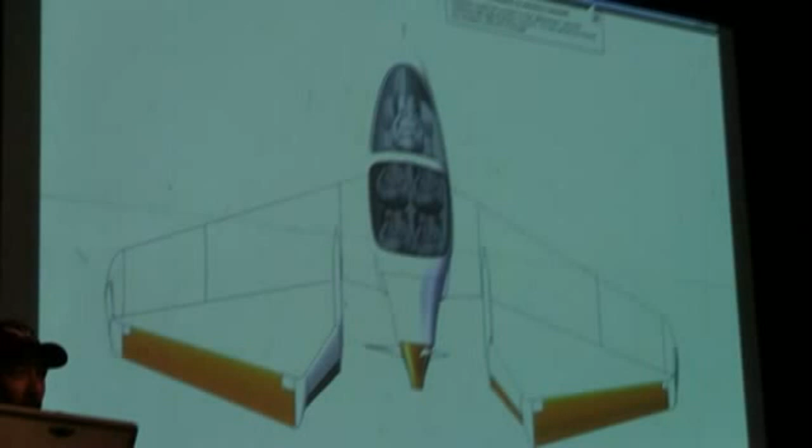I want to talk a little bit about Synergy. I know that some of you know very little about it, others of you know a great deal about it. Most of what you can learn about Synergy is available online through either the Synergy Aircraft website and the links. But more of the stuff that we like to talk about is on Oshkosh 365. That's now archived, we'll be moving new content to the AIAA forums. So I'll encourage all of you to look online, just Google Synergy Aircraft if you want to find out more stuff.

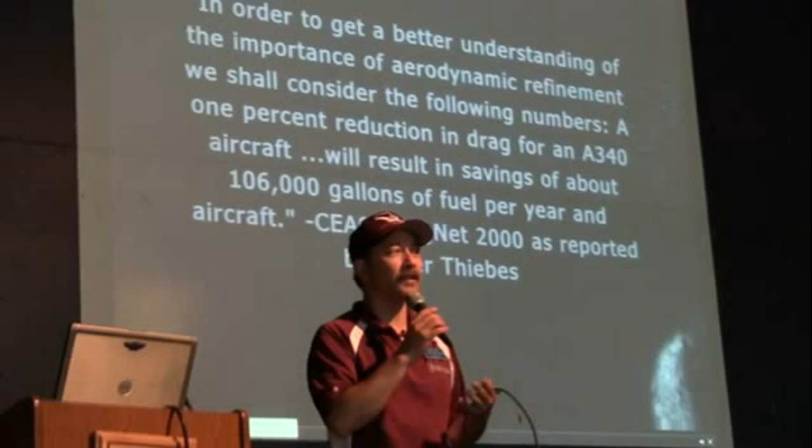But before we talk about the details, and I will have a lot of time for questions and answers, I really want to talk about the bigger question. And that is why bother to do this? It's crazy. I told you I couldn't afford my airplane, I couldn't afford to buy an airplane. I didn't feel like I could even afford to put a few thousand hours into building something, a composite kit like I wanted to. So what did I do instead?

Come up with something new. I'm 50,000 hours into that, so it's not like I'm actually saving anything. But the reason why we have to do this sort of thing should be obvious to everyone.

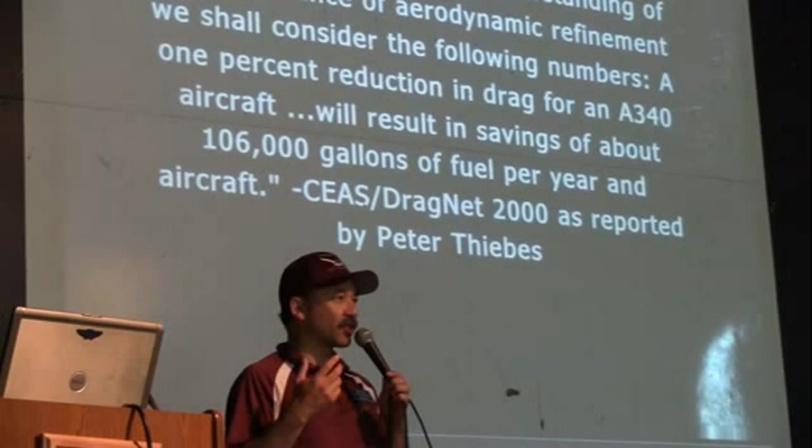We have an extreme need to replace 330,000 aging general aviation airplanes. Everyone here knows we don't drive 1967 cars for the most part. We do revere them, we do take care of them, we do preserve them. But they don't offer the value proposition that the general public wants and needs. Our airplanes, we love them, but they don't offer the value proposition that the general aviation public actually needs.

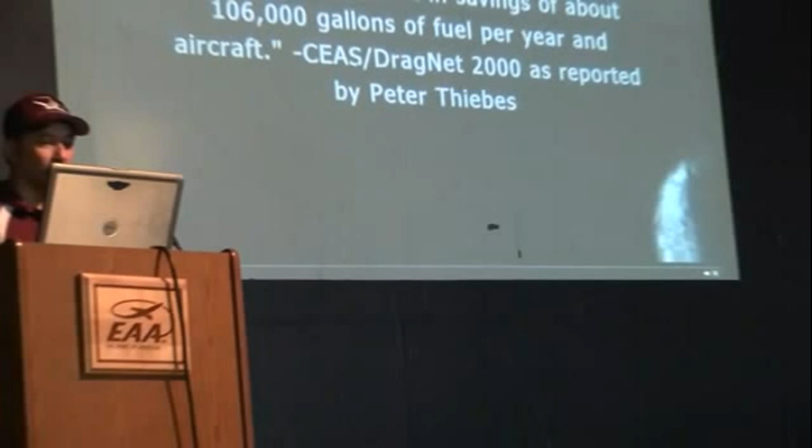We need to fix the broken hub and spoke transportation system, and in order to do that we need to understand what the problem really is. I don't think that, since this is really old information and we're resurrecting it out of the archives of the 1910s, 1920s, 1930s, that we're as intimately familiar with it as we should be. We don't fly airplanes using effective fluid dynamic techniques.

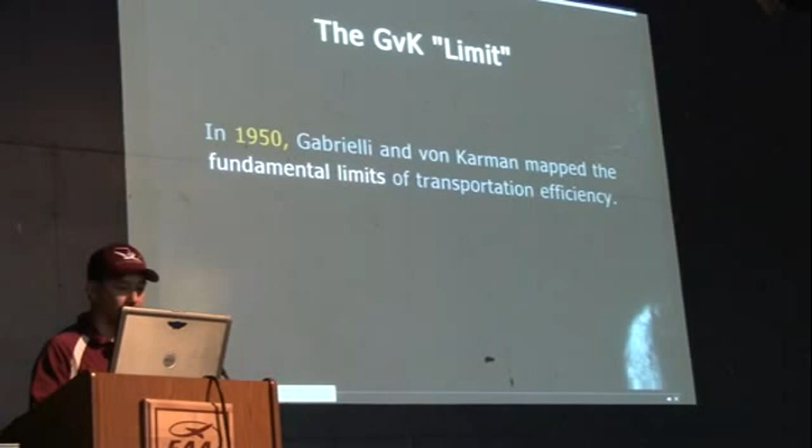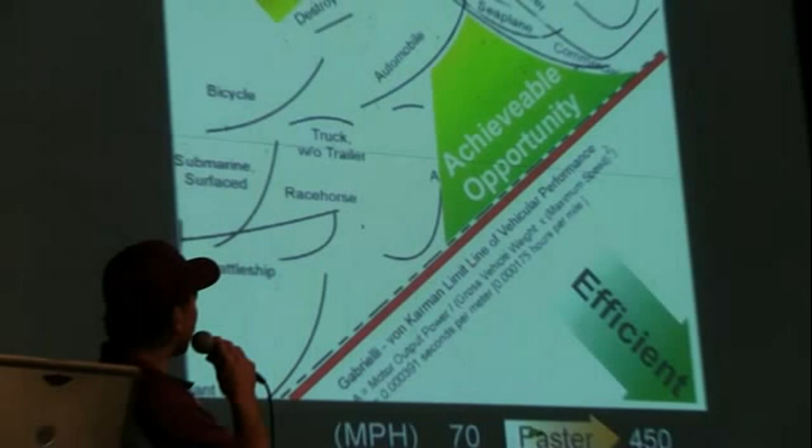This is a study of the problem. Gabrielli and von Karman studied it in 1950, literally. And what they discovered was that most vehicles travel from slow to fast, from light to heavy, on a scale where this is energy use and that's speed.

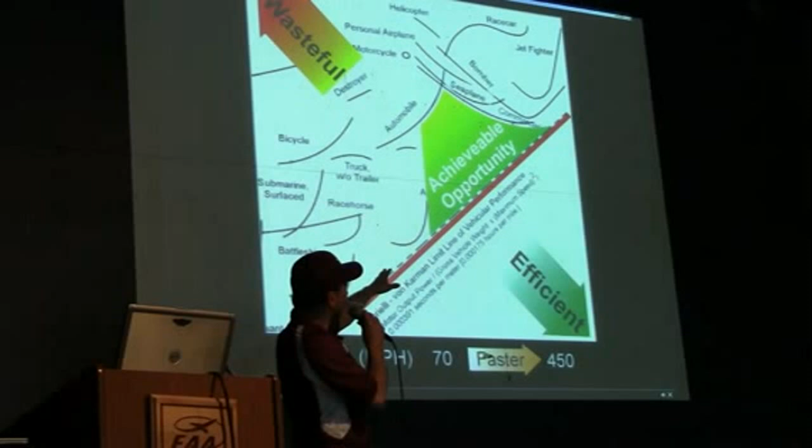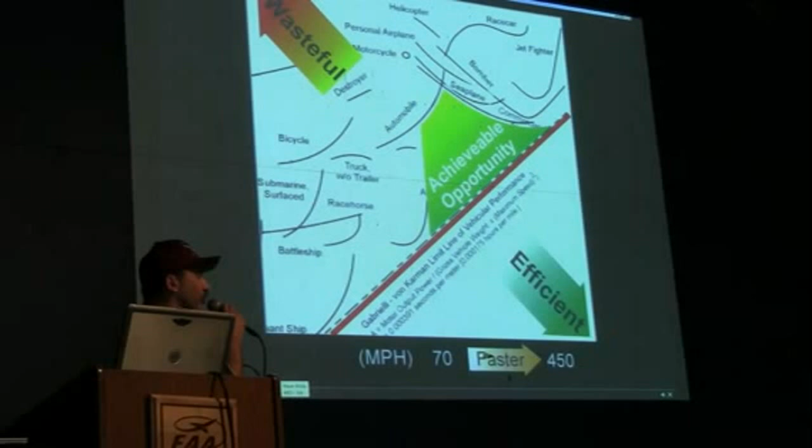And when they found out that fighters and airplanes and bombers did okay, and battleships and merchant ships did okay, railroad cars did okay, and so on, but between 70 and 450 miles per hour, we do not know how to fly. We pay a tremendous penalty for trying to fly with a heavier than air aircraft.

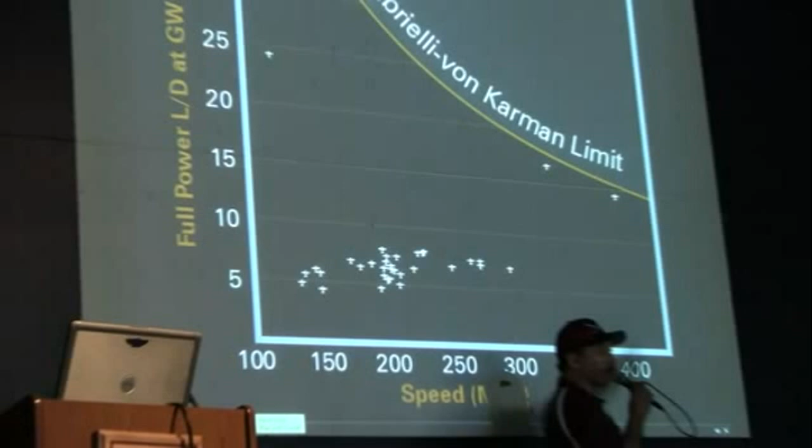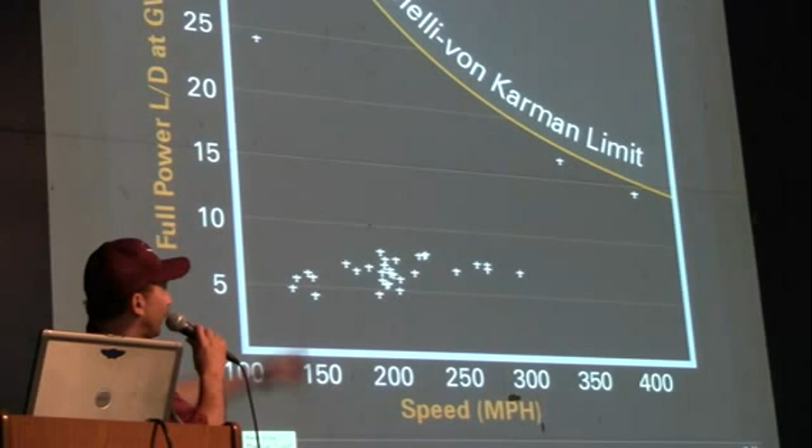When the same information is put into a form we're more familiar with, this is full power L over D at gross weight versus speed in miles per hour. And here is AirVenture, where you can wander around and see all those airplanes. But what's possible is actually not the yellow line, it's beyond the yellow line.

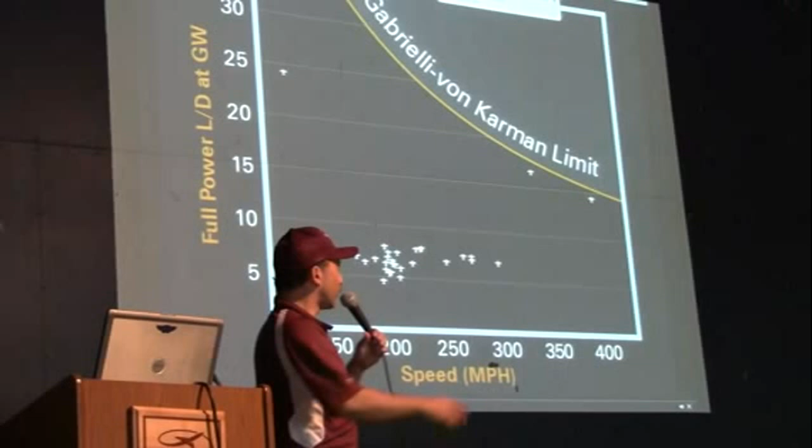The yellow line is where we can get with present-day technology. Folks, this is an indictment of a century of aeronautical teaching based on a premise that's a little bit flawed, not very flawed, but it's a system unto itself. If you step outside that system, you move from a closed thermodynamic perspective that uses dynamic pressure, 1/2 rho v squared, into the paradigm of open thermodynamics.

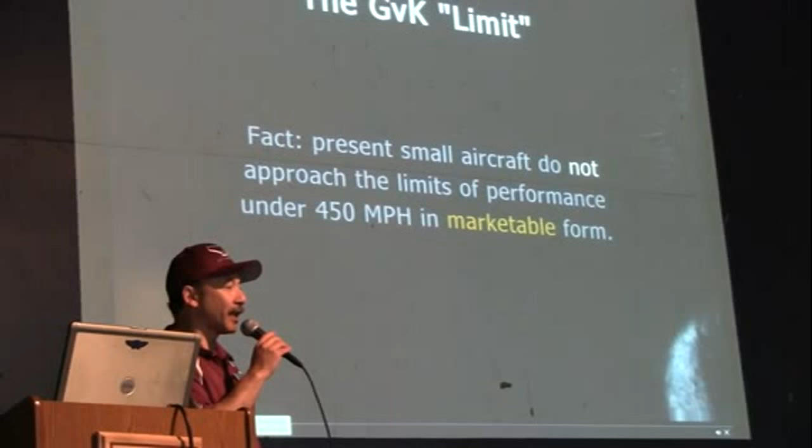Taking the fact that we have an engine and a fuel source, let's use that to modify this problem of viscosity of the air we fly through. So synergy is really all about flying using the principles of open thermodynamics. There's been a little bit of misunderstanding about what I mean by open thermodynamics. I'm not talking about heat, cooling, or drag. I'm partially talking about using engine power to control the boundary layer, but there's a little more detail we'll talk about later.

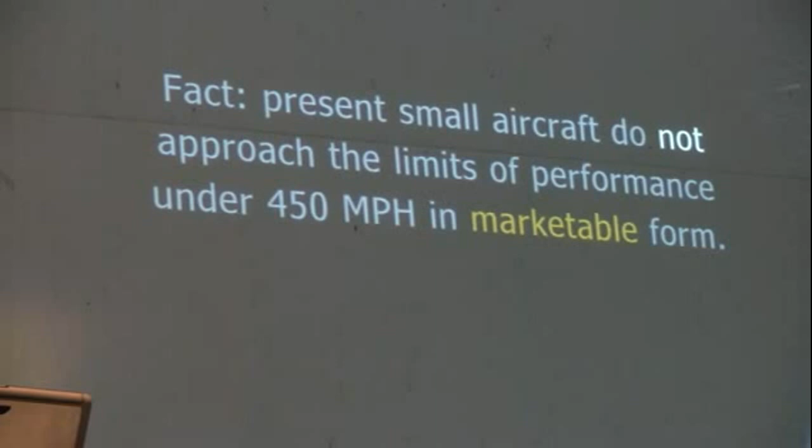Up until now, when we try to approach the Gabrielli-von Karman limit, we wind up with special purpose aircraft. As most of you know, I'm entered in the NASA Green Flight Challenge. We sure hope we can pull it off to be there up to this point. If they hadn't had to delay the contest, we would not have qualified to be in it at this point in time.

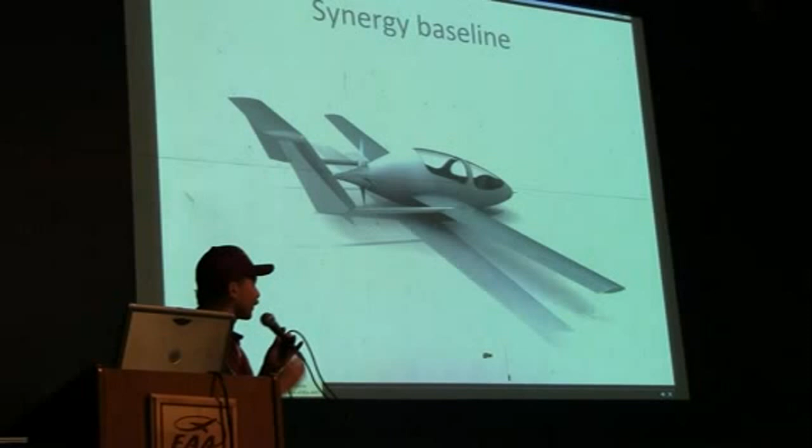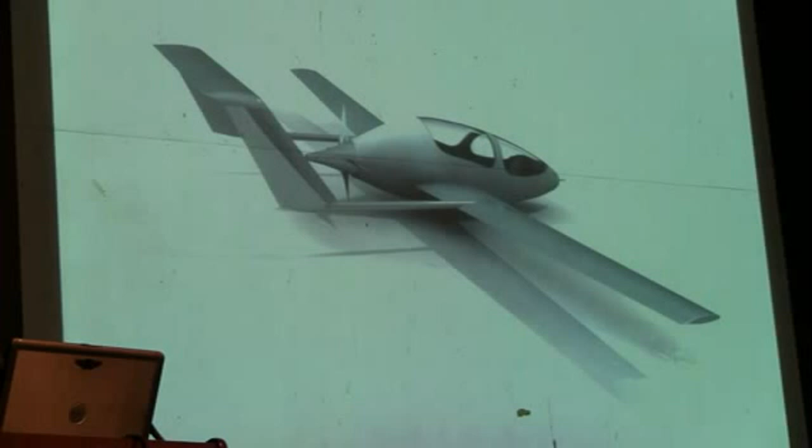And so this is where we start. When I started talking about these principles on beyond streamlining, I imagine most people would come up with something like our baseline aircraft. It's pretty cool looking, I think people like that plane. It's a big, roomy, four or five place motor glider, but it has a lot of limitations.

Very efficient, but not very practical. So we can't really call things like this state-of-the-art, even though we continue to produce long wingspan, high aspect ratio, relatively speed-limited airplanes that are difficult to manufacture and inherently expensive.

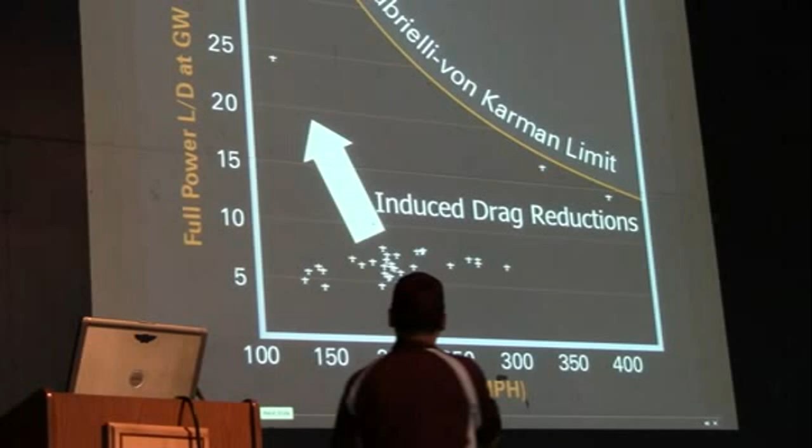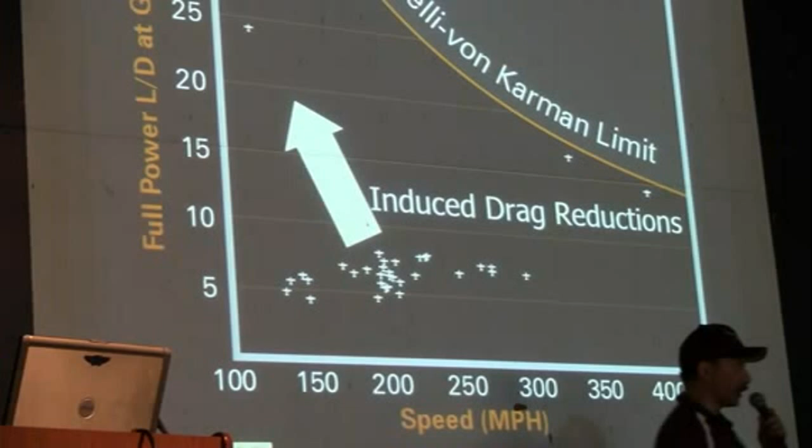So the problem of where we are on the graph versus getting more L over D takes us backwards. If you take a typical general aviation airplane and focus on the induced drag problem by giving a longer wingspan, we wind up slowing down in the quest for more L over D. You don't necessarily need more L over D. What we'd like is greater fundamental efficiency.

So as we go faster, we get a lot less need for L over D. I think that's the point we talked about earlier.

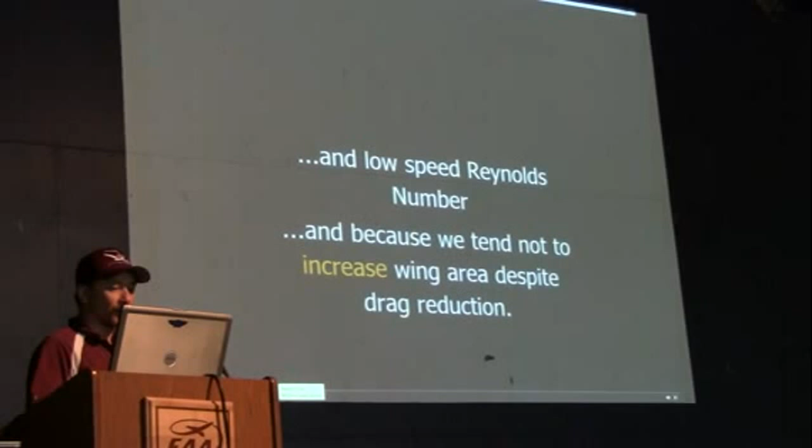This is a significant statement. A lot of our wings are very narrow chord, very short chord Reynolds number, meaning they're flying slow with respect to the air itself. If you increase wing area or chord, you can hit a sweet spot in the Reynolds number versus drag equation, giving a little more opportunity.

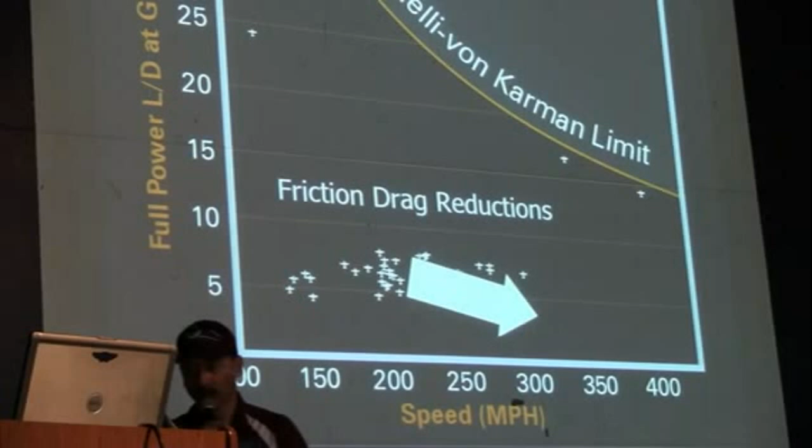And that's illustrated in this graph. As we go faster with a typical general aviation airplane, we lose our L over D. So why are we doing this? Why are we going for more L over D or more speed instead of going directly at the problem?

You have to take aim at both things at the same time. Less induced drag is critically important, but so is managing small-scale viscosity, the boundary layer turbulence that sucks your airplane and sticks you in place.

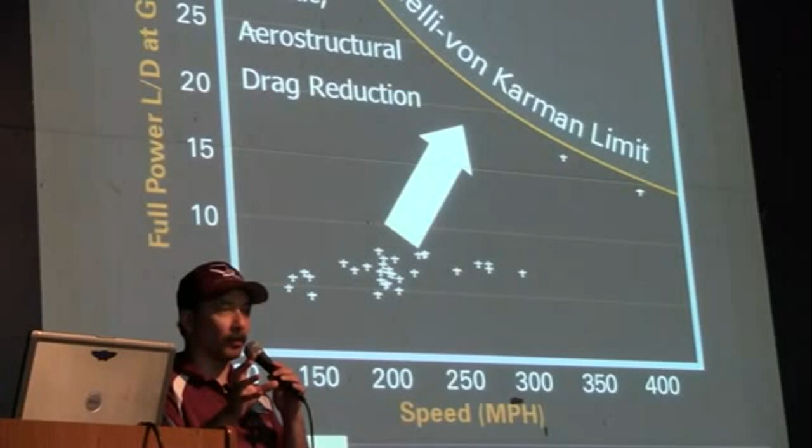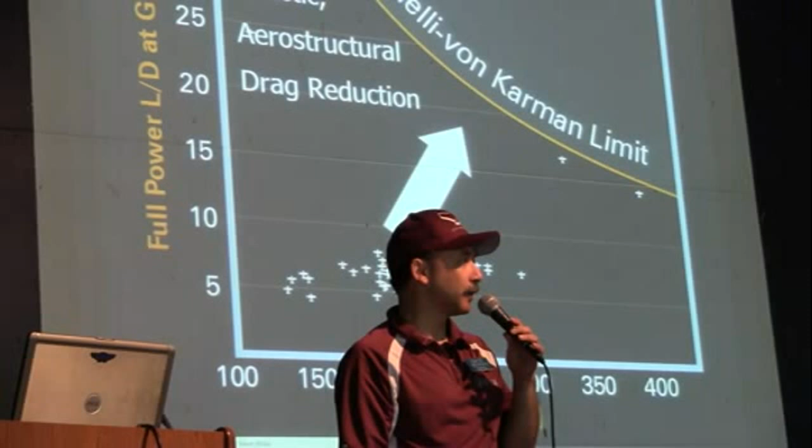I'm going to plant this thought in your mind briefly, because we'll get to a neat illustration of it shortly. You can't see the air, so you don't really realize how sticky it is, that it's sticking to your plane. You're dragging it along. If you flew through a cube colored a particular color, and you could see that air, you would just be dragging it along the sky, painting a big old stripe across it.

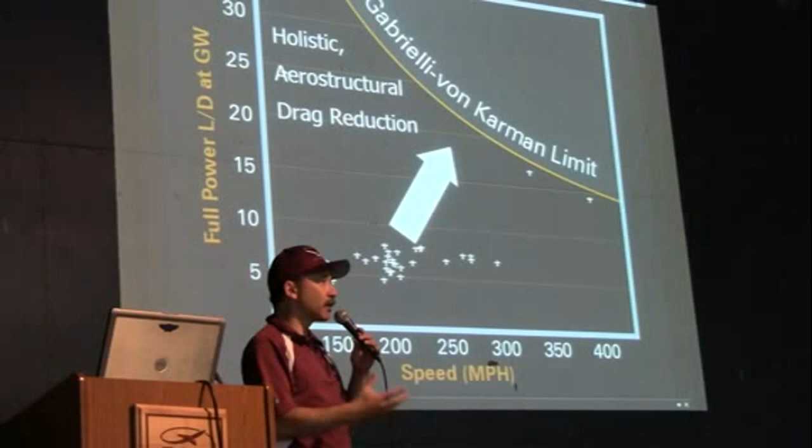And of course, we do see this from time to time in our wake vortices. The wake vortices get dragged on for miles and miles. That's what drag actually is. Fluids don't have any drag.

D'Alembert proved in 1752 that a perfect fluid has no drag whatsoever. You can fly through it at any speed with no drag. But if I introduce viscosity into this equation, if I make it sticky, then you have drag on the small scale, the skin friction of the airplane, and drag on the large scale, the wake vortices of the airplane.

So in other words, to get to the Gabrielli-von Karman limit, we have to go intensely after wake vortices and skin friction, both at the same time, because it's like the air is ketchup. The air is like ketchup, it sticks to everything. You throw ketchup on the table, and I take a spatula and try to get it off. What am I going to do?

Are you following this? Ketchup on the table - clean it up. Are you going to have anything but a mess? No, your experience tells you it's going to be a mess.

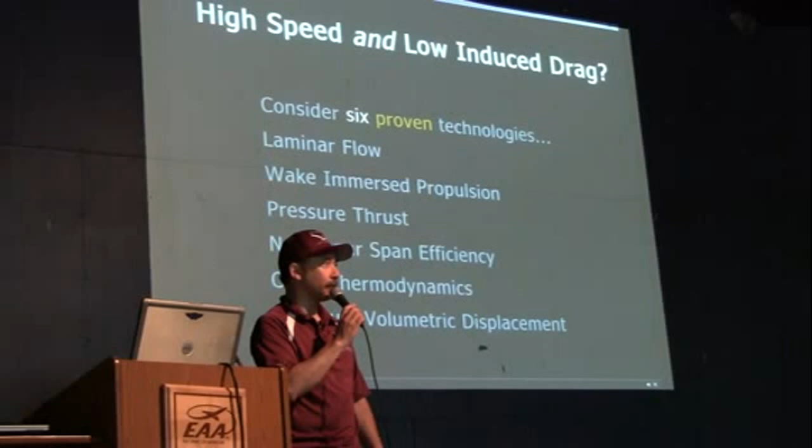That's what your experience tells you, but your experience is wrong when it comes to what we fly in airplanes. The idea that we have to drag the atmosphere with us is an incorrect assumption, and we need to go after changing that. Here's how we're going to do it. I'm not saying synergy is the only way - in fact, I hope it's the first of hundreds of ways. My goal is to propagate this technology into as many forms of airplanes as we possibly can, as quickly as we can.

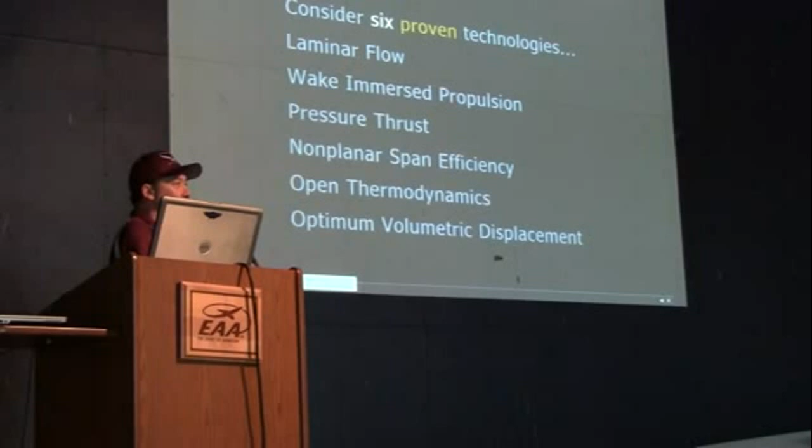We need to use laminar flow. We have a lot of planes that use good drag reduction, natural laminar flow, but they do that on the wings, and that's good. But most of the drag comes from the fuselage, so let's go after natural laminar flow on the fuselage.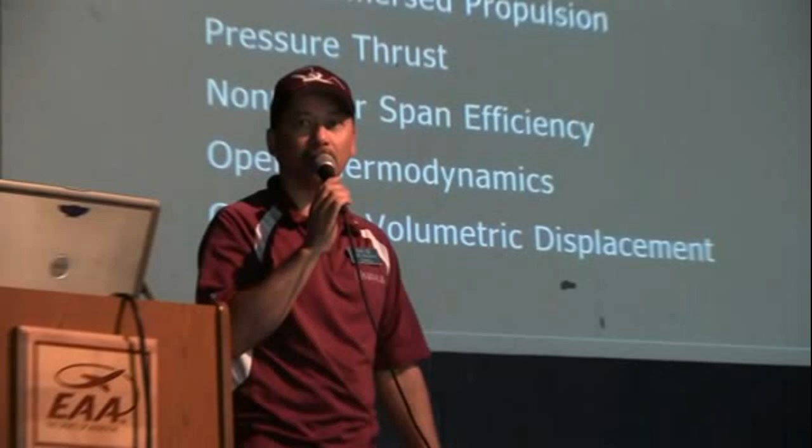Wake immersed propulsion is a great way to do that. When I say wake immersed propulsion, I'm not meaning a pusher-prop airplane. A pusher-prop airplane is not necessarily very efficient - we haven't delivered on the promise of having the prop in the back. As I usually do at Oshkosh, I present on prop design and get into a long-winded spiel about this, but...

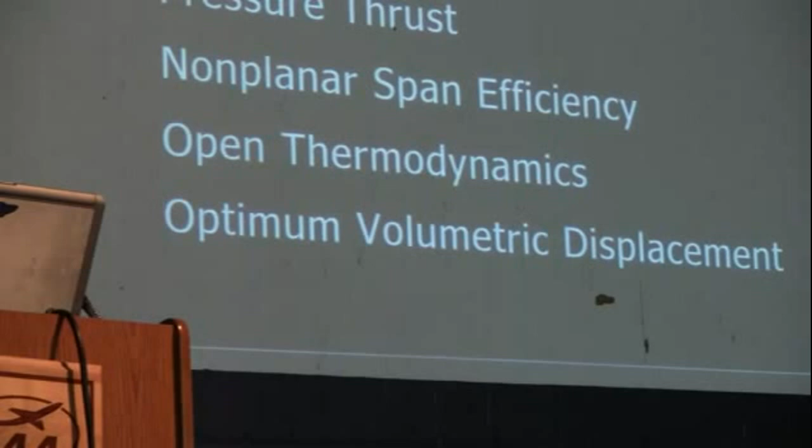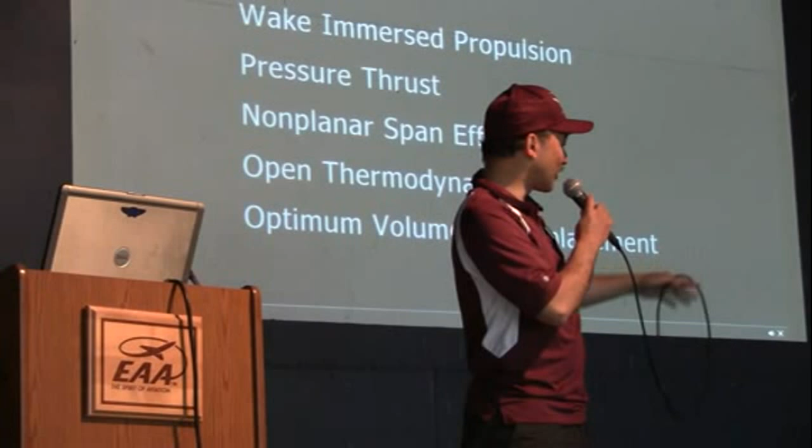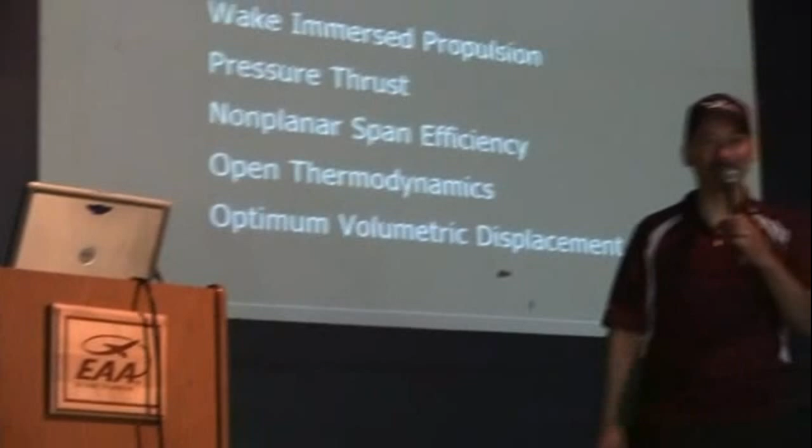I gotta tell you, my family is the whole reason that I get to do this stuff. They have heart and soul, sweat and blood, put everything we have collected into doing this work. My father and my son and my daughter piled into a truck and drove 36 hours to get here. When they were driving down the interstate, our suspension rig for the quarter scale model - one of the hooks came loose and smashed the nose into the trailer. Their hearts are on the floor, they're thinking it's all dead. They're trying to go to the hardware store to get stuff to patch it back together. They're sleeping in the tent by the airplane tonight. Oh my goodness, it's just that kind of story, day in and day out, year after year. This presentation, by the way, is one I've used before. My daughter Kelsey is an aspiring graphic designer as well - she had a nice presentation already for me. I didn't have time to use it, so I owe my family more than I could ever express.

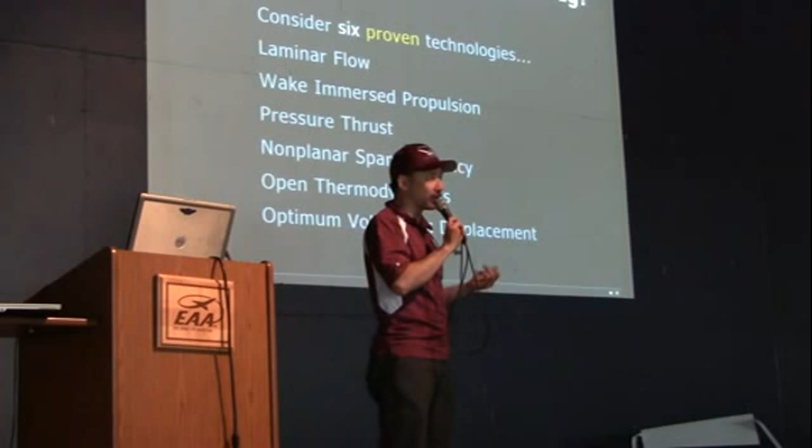Pressure thrust - oh, I'm sorry, I got to get back to wake immersed propulsion. The kind of thing you need on the back of an airplane is a fan. It needs to have a lot of blades, it needs to have a small diameter, it needs to have a lot of pitch. That's a nutshell synopsis of what needs to be pushing our planes through the air.

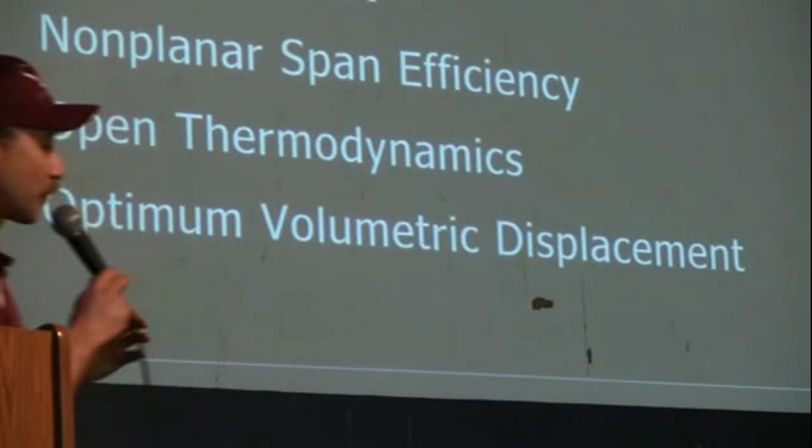It's extremely efficient. But instead of having something like that behind a body that doesn't seem to care about the inflow field, we need to make sure the body is a natural laminar flow body, and that we put the fan significantly behind the point of transition, and that we use good inflow design so we don't make that impeller fly in a terrible environment for making thrust. Wake immersed propulsion delivers the goods - it's at least a 20% improvement in efficiency over a standard tractor configuration if it's done correctly.

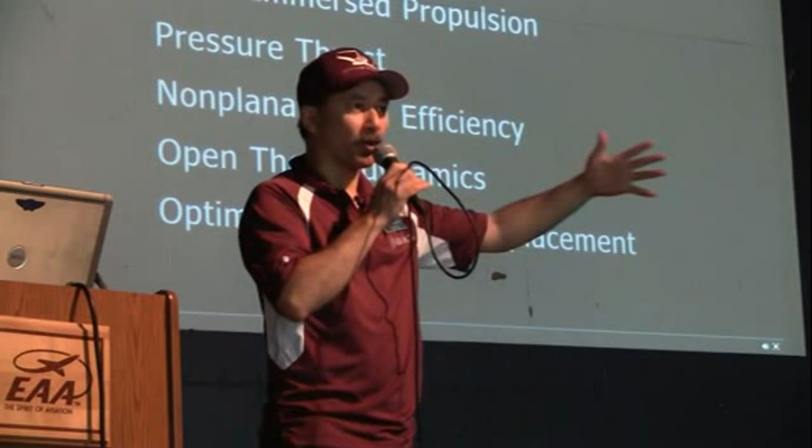The next point kind of conflicts with wake immersed propulsion, and that is pressure thrust. As Goldschmied evaluated, it's a way that you cause the air that you've parted with your body to collapse back on the aft body powerfully, so as to restore the energy that was lost in expanding that volume of air and moving through it. Now, I don't know why after 50 years we still don't really understand or utilize this concept. It's not rocket science, it's pretty simple physics, but we don't have any proof, we don't have any flying concepts out there making this a commercially viable thing so we can pour money and dollars into refining and optimizing it.

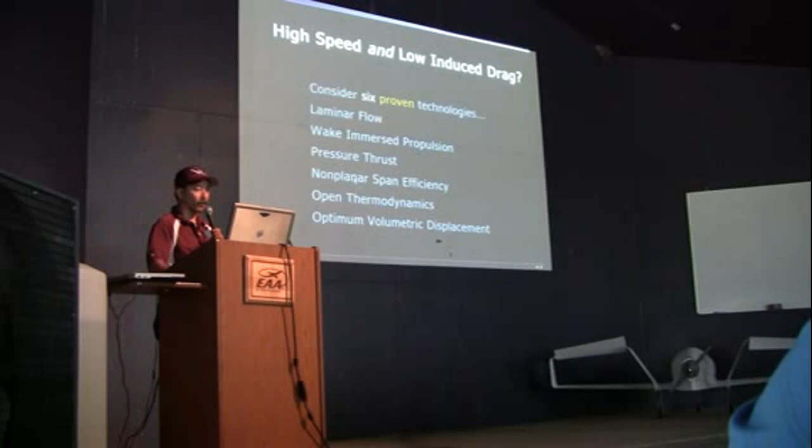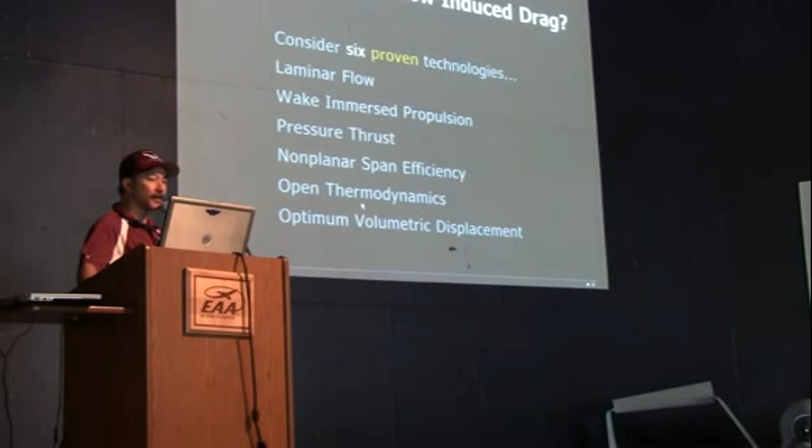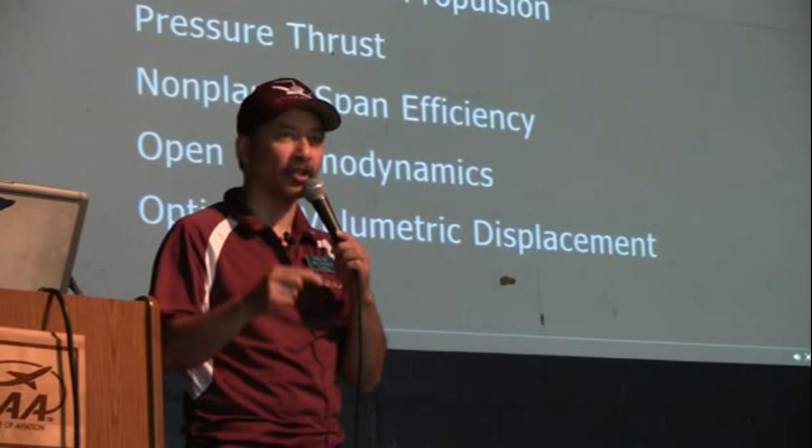Open thermodynamics is really the same thing as powered boundary layer control. It means using engine power, fuel, and heat in ways that change the dynamics of our calculation system. When I talk about Synergy to folks who are heavily reliant upon textbook mathematics, CFD, spreadsheets, and other programs to deliver preliminary evaluation of an aircraft design, I have to tell them: look, you've got to get under the hood. Look at what your calculations are actually showing and telling you. Some of what they're telling you is only true 95% of the time. And when it's not true, it changes everything.

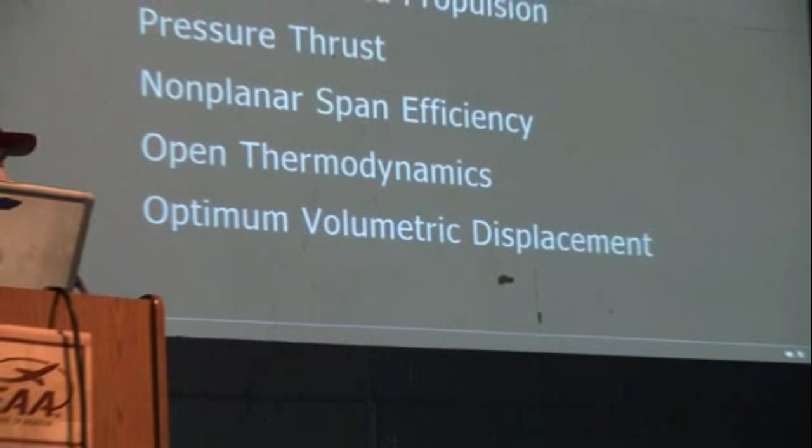So we're still in search of a better fluid dynamic calculation paradigm, a program that will do it right all the time and do it in real time. I've got a couple ideas about that, and hopefully we'll get to them.

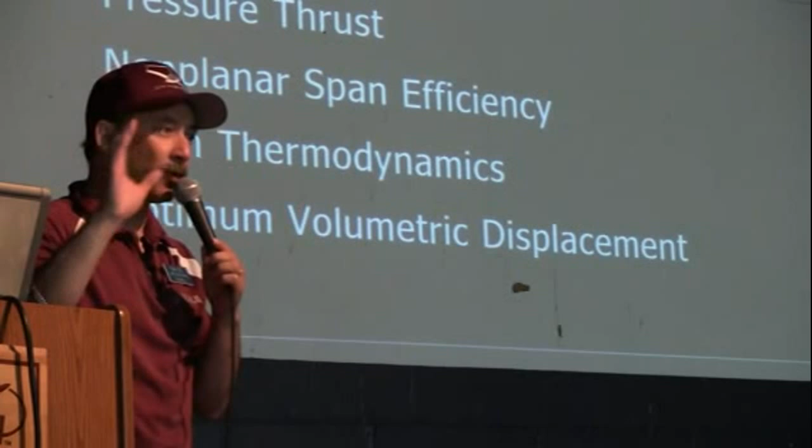The last point is optimum volumetric displacement. That's subsonic area ruling. That means we're not going supersonic here, but we're going to treat the design of the airplane as if we were. We're going to gently disturb the air, not disturb it with pulses, not disturb it with a huge variance in the cross-sectional area that we present to the plane, to the atmosphere.

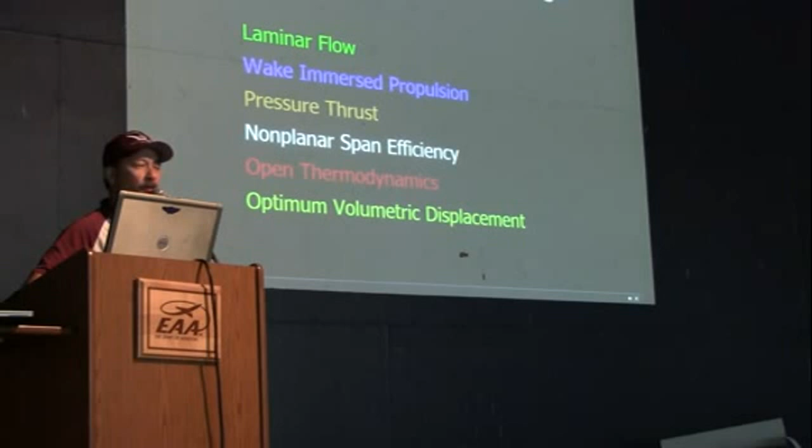So the problem we have here is that these things are hard to combine, and science doesn't like me for combining them all at once, because how are we going to know what's really responsible for the results? You're supposed to change one thing at a time and have a nice control. The only problem with that is it would take another 150 years, and we don't have it. We don't need complicated solutions and Rube Goldbergs. What we need is something sellable, that you want to fly, that works. It's got to combine all of these things together, and it's got to do them in a way that is economical, easy to use, and delivers a solution for the general public.

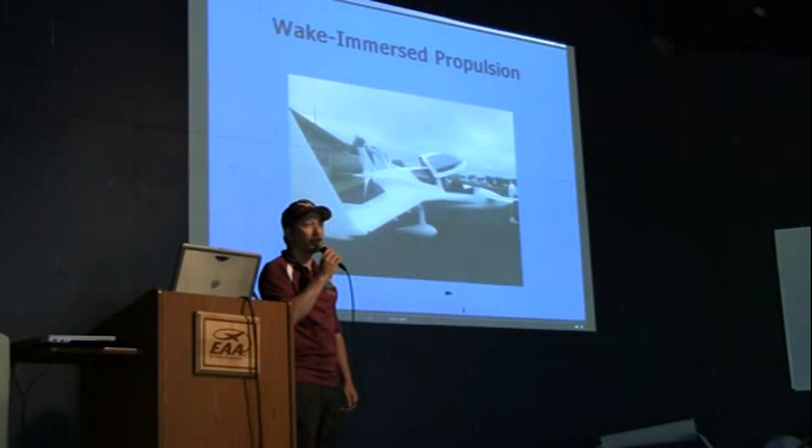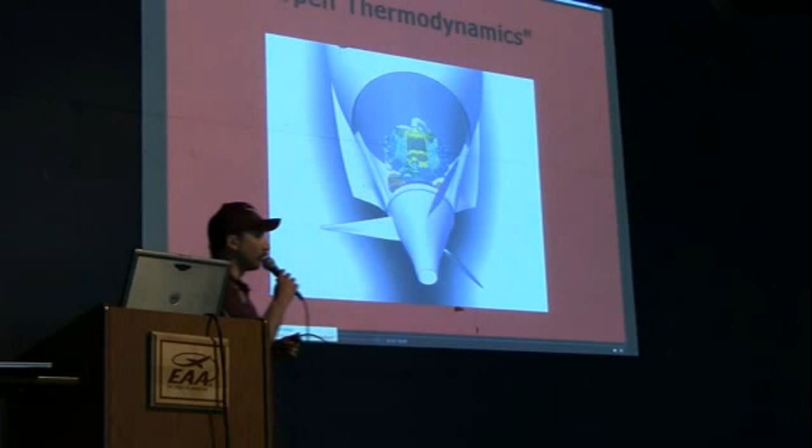The general public is afraid to climb into your airplane, and they don't really like the experience when they do. Who wants to sit inside of a tin can with headphones on, bouncing around? What we really need is an airplane that can fly at high altitude, get swiftly cross-country, directly point to point, and help fix the broken hub and spoke transportation system.

Okay, so that's why we're doing this. It's been beyond our means, but it hasn't stopped us. We're going to keep right on going.

The double boxtail configuration gives stability and control through induced drag reduction, and it uses a neat mechanism for that. Instead of being a box wing, like a lot of other airplanes that have been relatively unsuccessful, it uses, again, a double box tail. Whereas almost everything that's been populated out there in the design space about box wing designs has been commercially unsuccessful and or semi-dangerous, Synergy is inherently stable. In fact, that's one of the things that's most striking about it. It's solid as a rock.

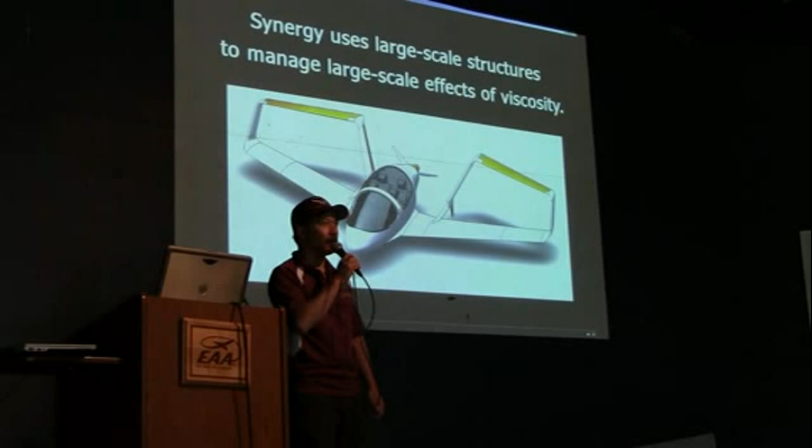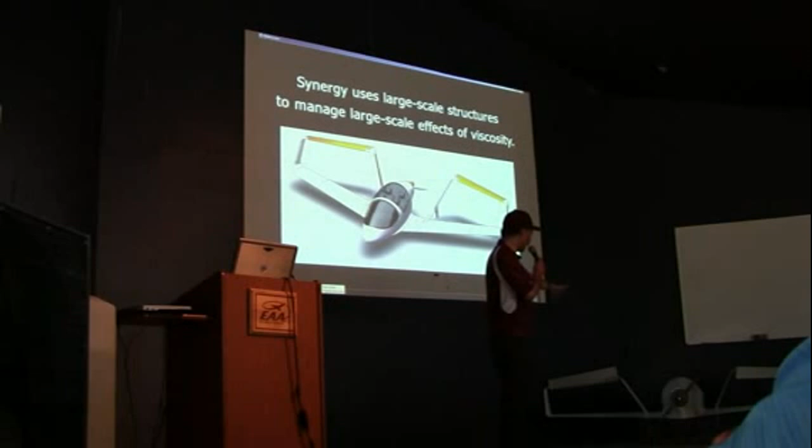It also has some interesting attributes in its flight. When you turn, let me see if I can illustrate this. Looks like we're going to make a left turn here. That's a rather radical roll rate if you had that much deflection, which you don't, but let's say you had a little bit less than what you see there. What happens is this is making a little more drag, and this is making a little less. That's the opposite of what you'd have with a regular airplane. So instead of having an adverse yaw condition and the need to coordinate rudders when you turn, it has a proverse yaw condition, and it carves the sky. It just basically rolls and the horizon stays level, and you pull as many G's as you like.

The way this manages wake vortex is we use large surfaces. You take little fingers or little winglets or something or other and put them on your wingtip — you can't expect to control large scale effects that way. There's a lot of energy that's thrown by your airplane at the ground.

The air is thrown at the ground by your wing very effectively and efficiently. When you move 3,000 pounds of air toward the ground very rapidly, you're not going to control it with a little fingertip on the wing.

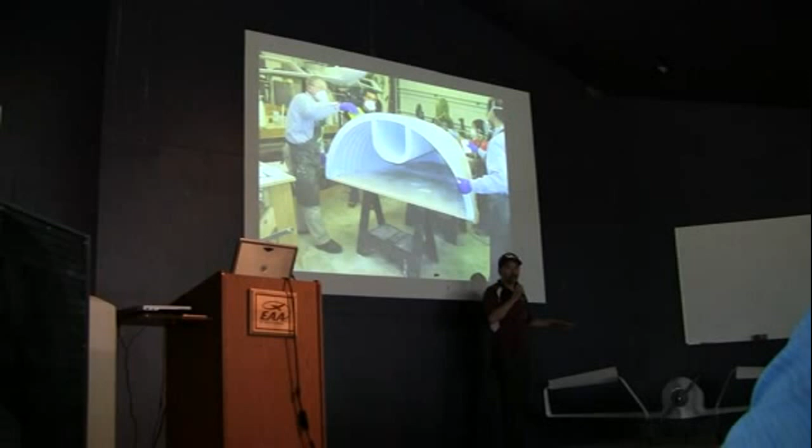So the way winglets get more efficient is they get taller, and you can go as tall as you like, just keep right on going. But there's a point at which structurally that doesn't make sense anymore. So a winglet tends not to get very tall, and we learn quickly that it's not as good as increasing the wingspan. So instead of adding taller vertical surfaces, we say it's better to just increase the wingspan if we can get away with it.

But Synergy says, okay, we're going to throw some air sideways with the winglet, and some air upwards with the elevon, and use that physics to reduce our induced drag. The air has already been disturbed anyway. We're not trying to violate any laws of physics. You don't get something for nothing, but when you have air that's already been thrown at the ground and you're acting against it, you get your stability and control for free.

The zero trim drag component is possible using approaches like this. I don't know if we've got that or not, but we'll find out.

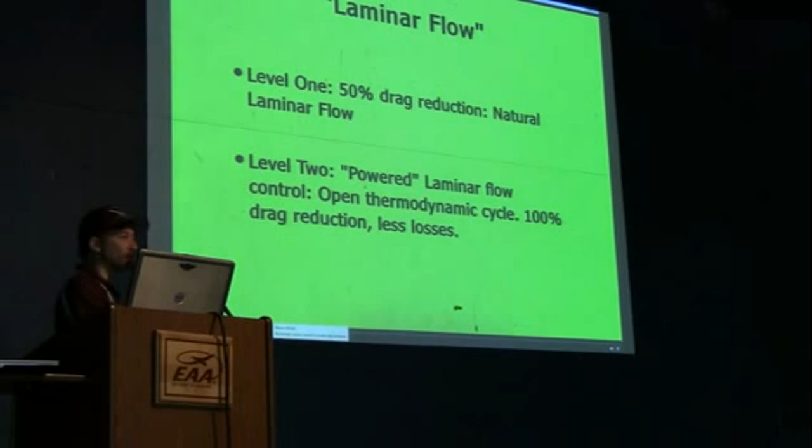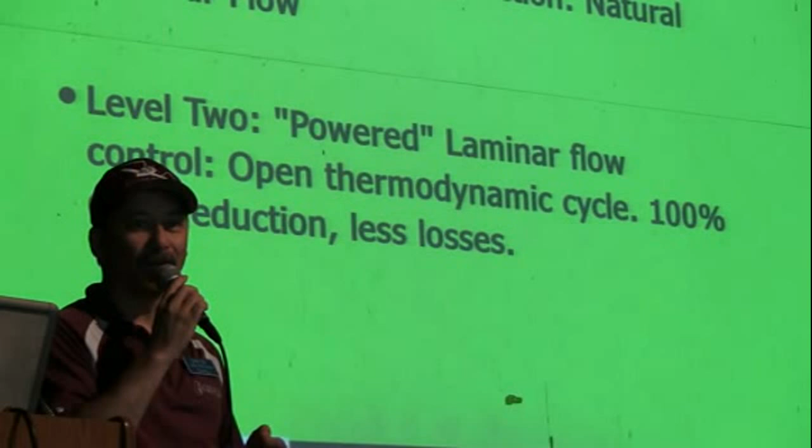But the next step beyond natural laminar flow is to use powered laminar flow control. The experiments of the past haven't been very promising because of the way they were executed. Instead of having a massively complicated million-hole electron-drilled boundary layer control system, it's just not that complicated, folks. If you put holes in the back of your wings and drag enough air through it, you'll basically achieve what August Raspet would achieve: huge increases in maximum lift coefficient and huge decreases in drag.

So it's a mass flow problem. The experiments in the literature were all about, can we do this at supersonic speed on jet fighters? Can we do it at near-transonic velocity on commercial airliners and so on? Its real application is most suited for the general aviation environment.

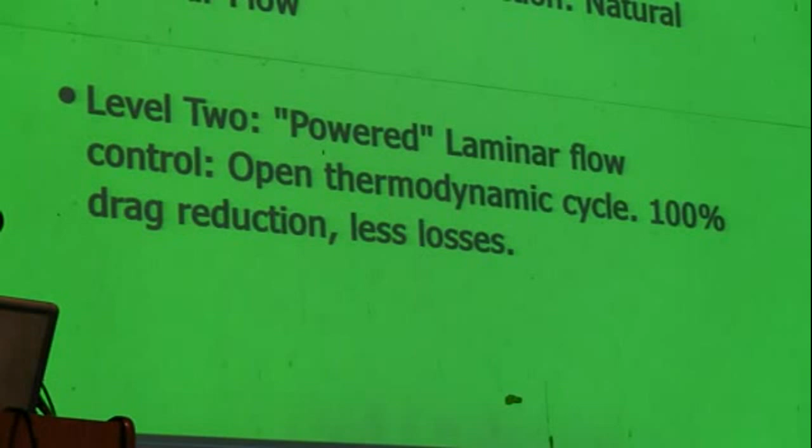So we've put together a little bit of a wing section so people can see how we're actually going to do that on the Synergy design.

So we use small scale structures to manage viscosity on the small scale. And again, the air is sticking to your airplane, so we need to take that air that's stuck, drag it into the plane, and spit it back out. It's simple to do that. Blowers are pretty efficient—for a 6 horsepower blower, you can achieve the same performance results as a 100 horsepower thrust increase.

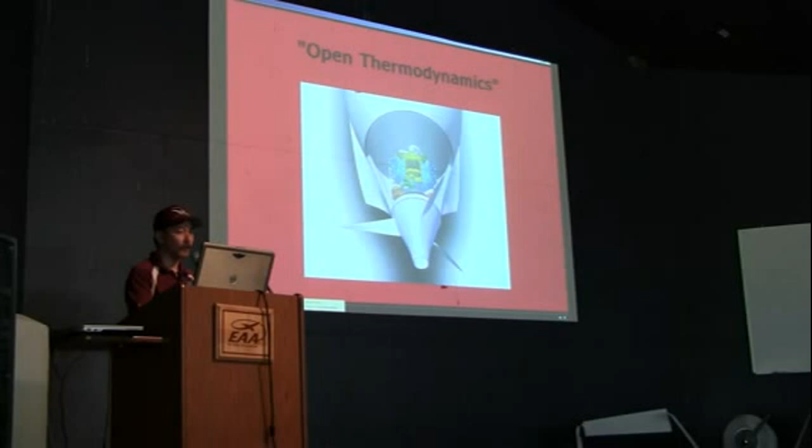And that's open thermodynamics. So let's return to this illustration. The key to understanding how to fly with a heavier-than-air airplane is to manage the viscosity of the air.

Ketchup is a familiar viscous medium. So you probably shouldn't be able to clean this up like this. But you can.

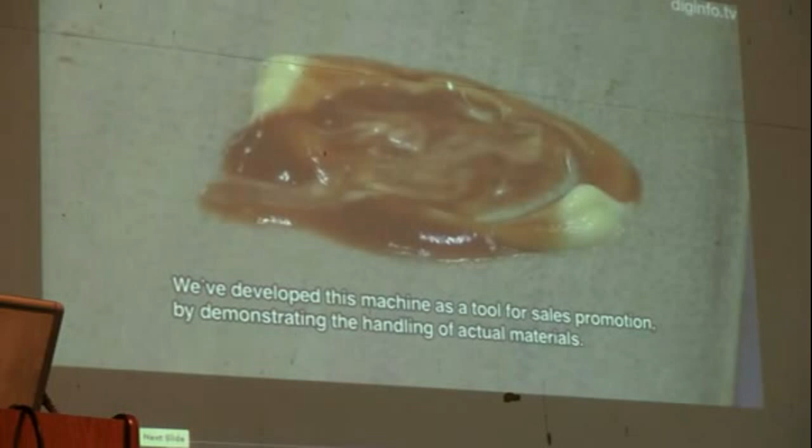This is called SWITL. It's an industrial robot tool developed in Japan. All it is a plate. The plate goes out, but the skin that's wrapped around the plate like a treadmill is fixed on one end and spring-loaded on the other.

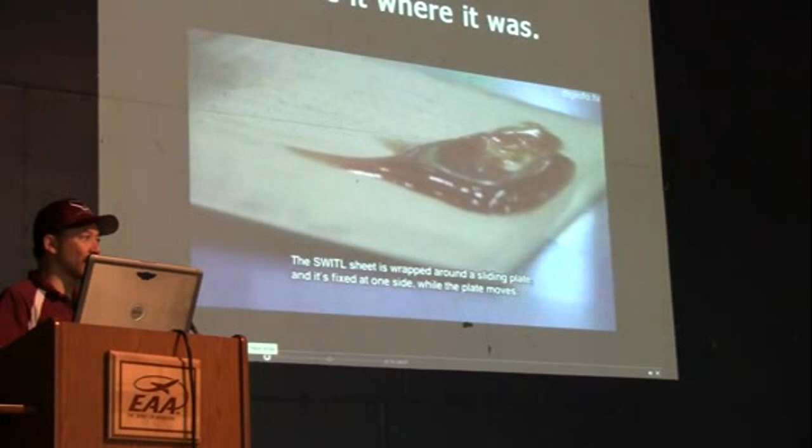And the result is that the surface that's next to the object you're touching doesn't move. It's a minimum entropy result. There you go, it disappeared. See, it is magic.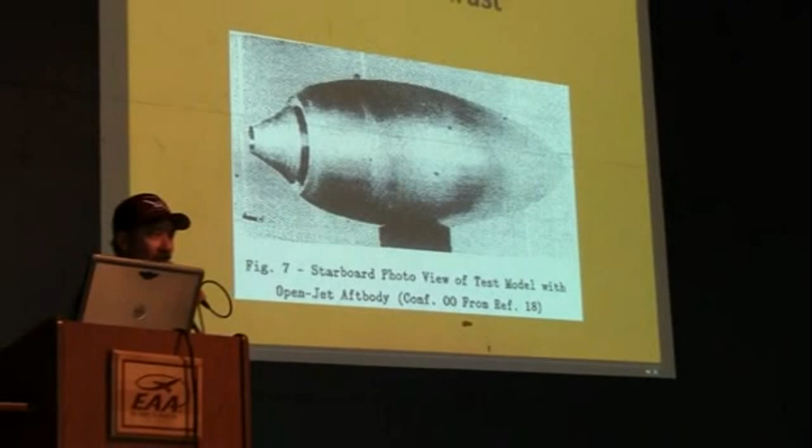Okay, so pressure thrust is how we do this with air. It's a little different physics, but the principle works the same way. You're trying to move through the air without disturbing any of it, trying to not take any of it with you.

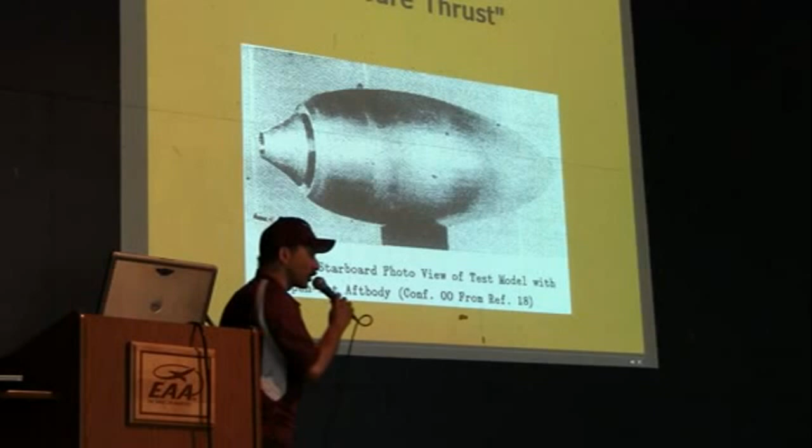In a pressure thrust concept like the old Goldschmied body here, natural laminar flow would be possible, except Goldschmied didn't do that. He tripped the flow clear up front, 10% chord. So we have this, even a turbulent flow body can get back past the maximum thickness, and if you suck that boundary layer in and spit it out the back, you know what kind of drag number you're going to have? How about 2% of what you would normally have for a body of that volume?

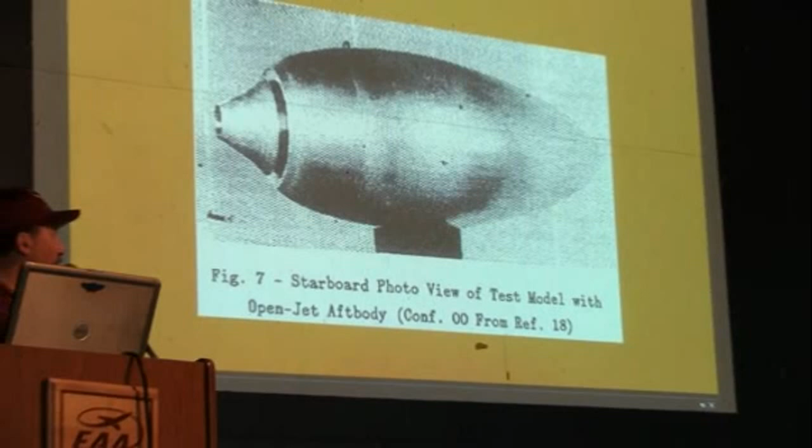So in Synergy, the pressure thrust concept is minimized because we can't just do that when you've got a wake propeller. All we can do with Synergy is have a nice, gentle, concave transition, feeding the prop as gently as we can, and by this we recover the boundary layer drag. You won't get pressure thrust. In fact, I don't want pressure thrust. I just want zero drag.

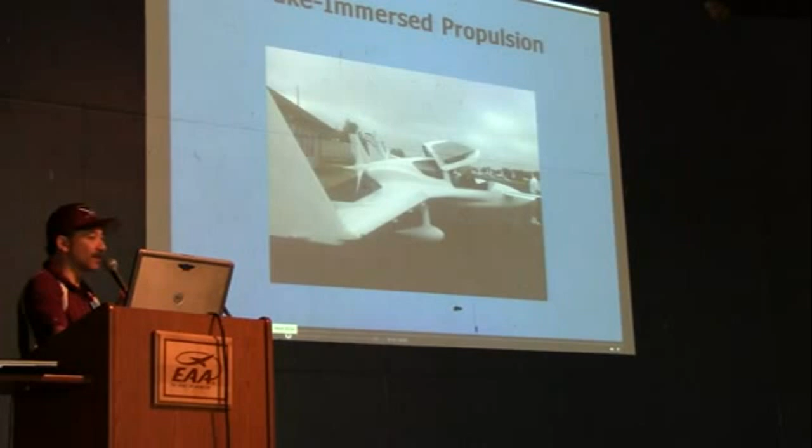So that means good wake-immersed propulsion, and as I mentioned, the number of blades and their design really counts. I'm not going to show you Synergy's actual fan, but that's an idea.

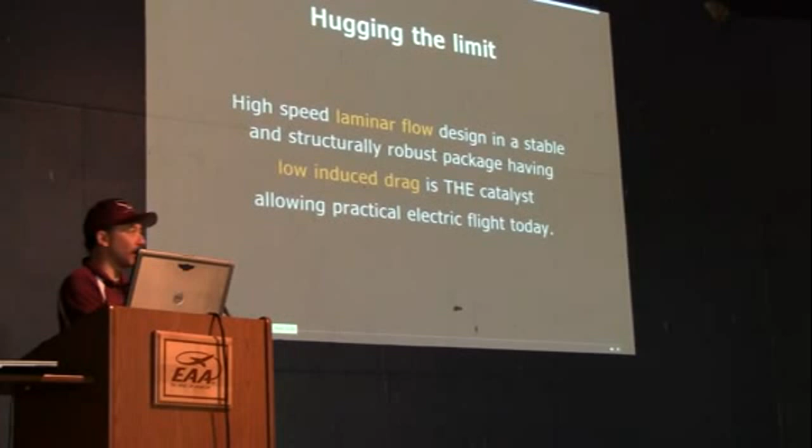So what we feel like is necessary for the airplanes of the future to be commercially successful is to exploit the human factor needs and the aerodynamic needs together at the same time.

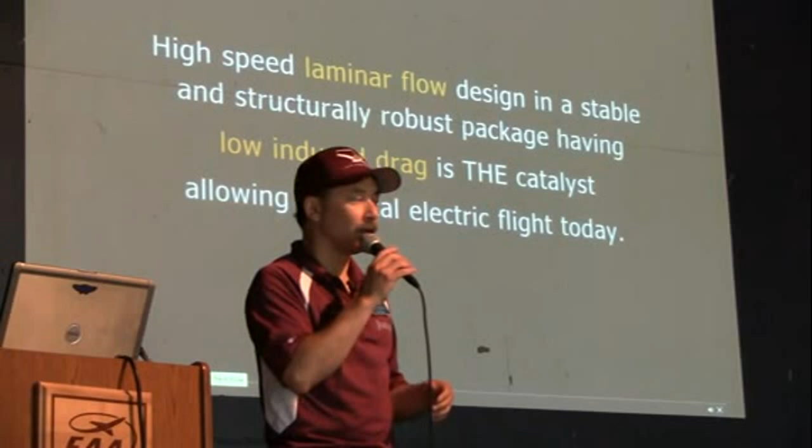We have to have big, roomy, comfortable airplanes that can fly fast, at higher altitudes, safely point to point. And we don't want to give up anything that we already know. Right? Why would we want to build a fast airplane? They just land too fast and kill people. Well, don't accept that. Build a fast airplane that lands nice and slow on a short grass field.

Or do what we're talking about doing, which is going the next steps beyond Synergy with designs that are even more optimized for their short field performance.

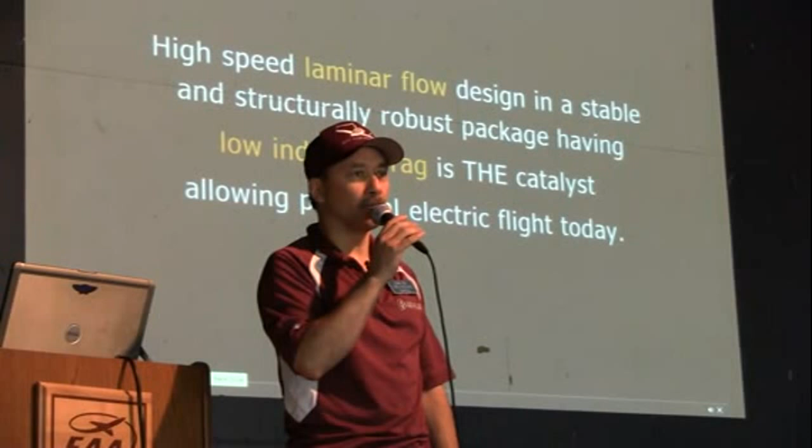A lot of people look at this plane and think it's two-place. There's a little ruse there. That's a 5 to 7 place plane, and it's huge. We've got a lot of room in it, and it turns out we could be roomier yet if we wanted to. But I didn't count the number of square inches I would be sanding, folks. It's a big job.

The quarter-scale aircraft that we brought here first flew in 2007. It was not designed to demonstrate any of the drag reduction technologies. Those were already demonstrated. What it was designed to do was to tell me whether or not I had my simulators lying to me. And it told me that they weren't lying at all. It told me that they were right on.

Sounds pretty cool, but the drag sound that you hear is because we didn't have any of the gorgeous wing filleting on there at the time. It was done without any of the wing fillets at all, so there's a real turbulent flow environment into the prop. But that is about 2/3 throttle on a 2 kilowatt electric motor.

The aircraft weighs 30 pounds, and it's not dynamically scaled at all. It's just proportionately scaled, dropped down from the full-size version of Synergy. So it has about 16 times the drag of our full-scale airplane.

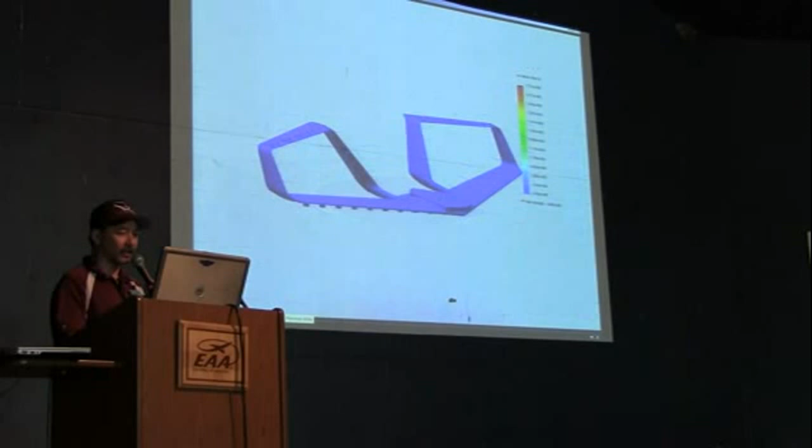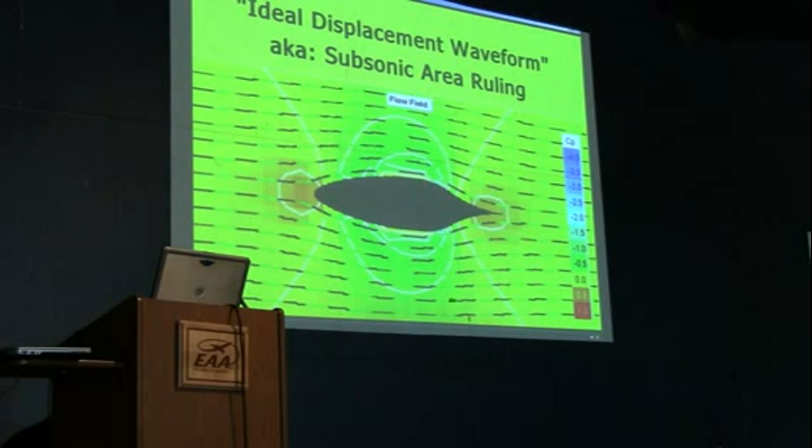The other reason we built it was to validate the structural finite element analysis. I was concerned, there's no baseline for how this stuff runs and moves and bends, and I needed a baseline. So when we put this together, we found out that the stresses were quite manageable. The direction they would occur in was totally different from what you'd expect, and we had to mitigate that with a lot of different things for the full-scale version of the plane.

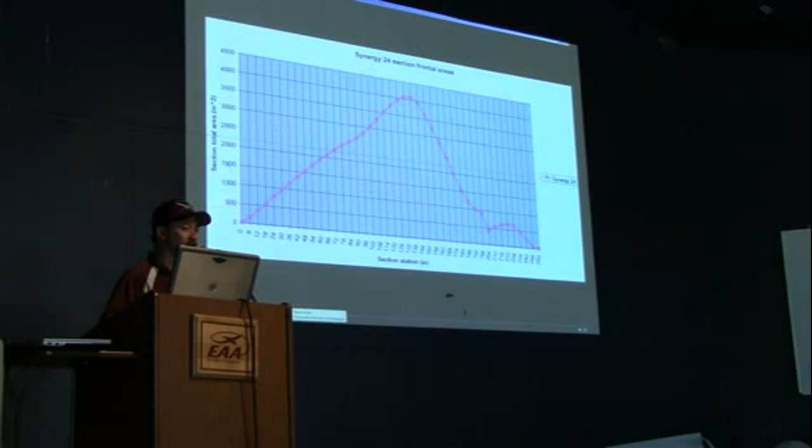It's displacing the volume of air in the same way that a smoothly streamlined, optimized body of revolution will. And that has a lot to do with reducing the wing interference drag problem that everyone wants to point out exists with box wings. Box wing airplanes in particular have a huge wing interference drag problem at each intersection. But when you have favorable biplane interference, you don't have that problem.

We've got not only subsonic area ruling helping us out to mitigate the drag of intersections, but we also have this phenomenon of favorable biplane interference.

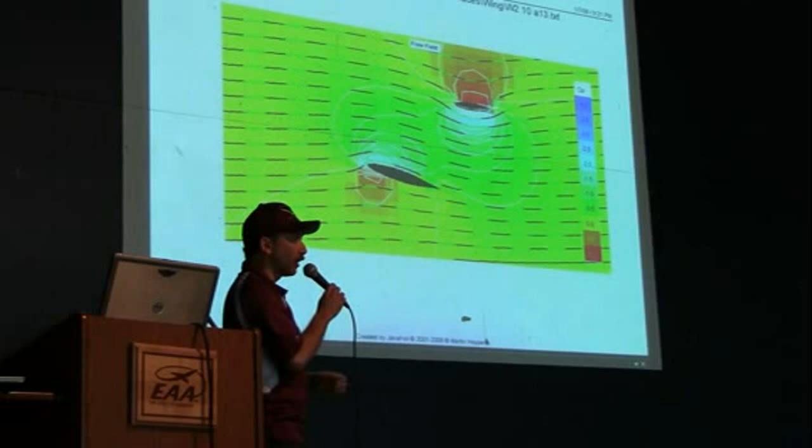But with Synergy we have favorable, constructive biplane interference. Because they're operating at different opposing angles of attack, the upper surface talks to the bottom and the bottom talks to the top, and together they accelerate and influence a larger volume of air than either airfoil alone. It's a venturi—we're creating a venturi over each wing, and that causes favorable translations of the pressure gradients between the elevons, the winglets, the V-tails, and the wing. Your supposed interference drag problem pretty much goes out the window. What little remains is easily addressed by having a stagger and nicely blended configurations.

We do have one of our actual winglets modeled up and brought it. We'll have it at the Aero Innovate event later on.

So that's mostly the overview of Synergy. I know there's a lot of questions out there, and I want to take them. If you want more detailed information, go to our website, our Facebook page, or Google Synergy Aircraft, and you'll find out a lot. And if you don't get your satisfaction there, give me a call or an email—happy to answer your questions. Let's start down there, what do you got?

The question is, is the ultimate goal to create a kit from this aircraft? We've already learned that people want this plane, so we have to respond to a demand for it somehow.

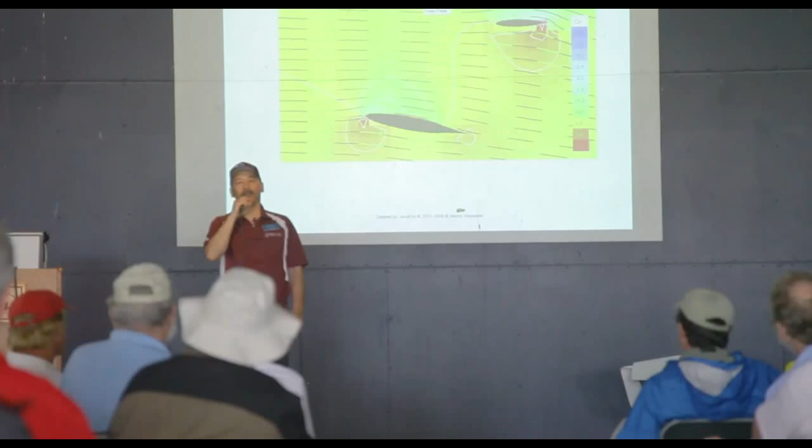You mentioned high speed and the Delta Hawk. What do you think the cruise speeds will be? Horsepower variant? I'm not going to talk about performance specifications at this point. First of all, you guys wouldn't believe me. And second of all, we don't know. We haven't seen that actually demonstrated yet, so it's a little bit silly to talk about.

As far as the specifications are concerned, I wanted a big engine in this thing, and the biggest engine that Delta Hawk offered was 200 horsepower. So I designed the airplane for that. Now, at this point, we can't get a 200 horsepower Delta Hawk. We can get a 180, but that's fine. That's perfect for the Green Flight Challenge, as a matter of fact.